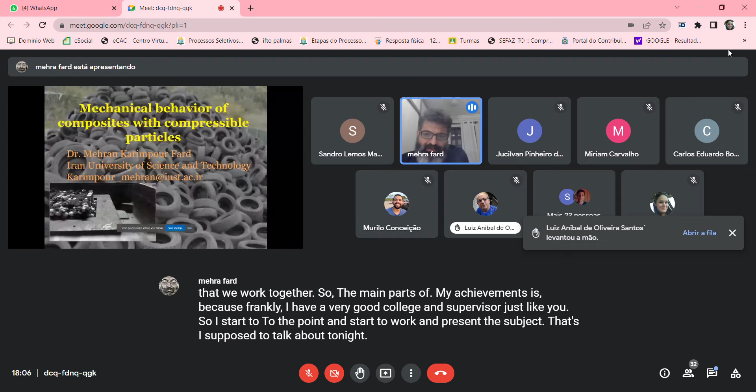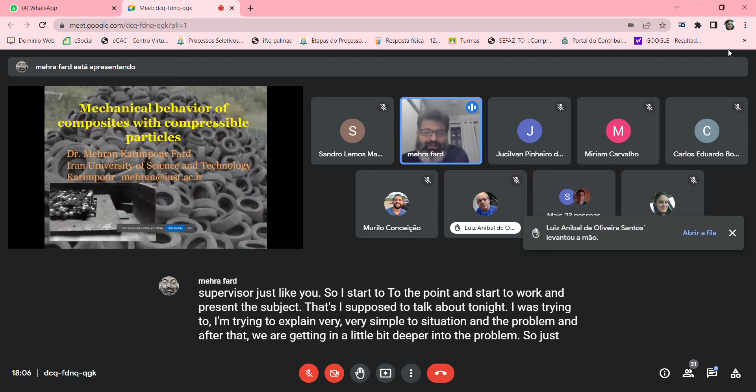So I start to the point and present the subject that I'm supposed to talk about tonight. I'm trying to explain very simply the situation and the problem, and after that we get a little bit deeper into the problem. So just for a final check, is my voice and everything okay or not? Yes, I can hear you perfectly. Okay, thanks a lot.

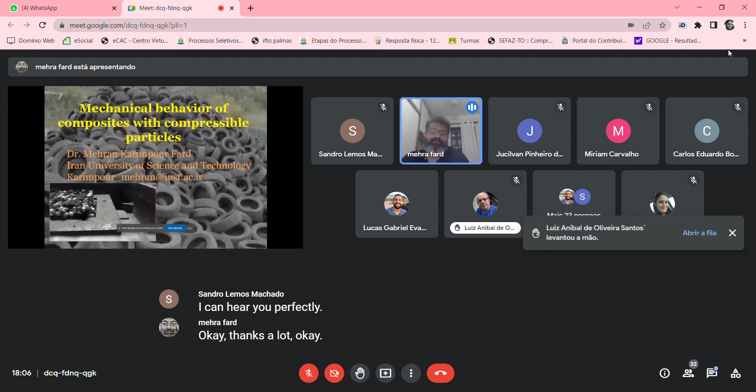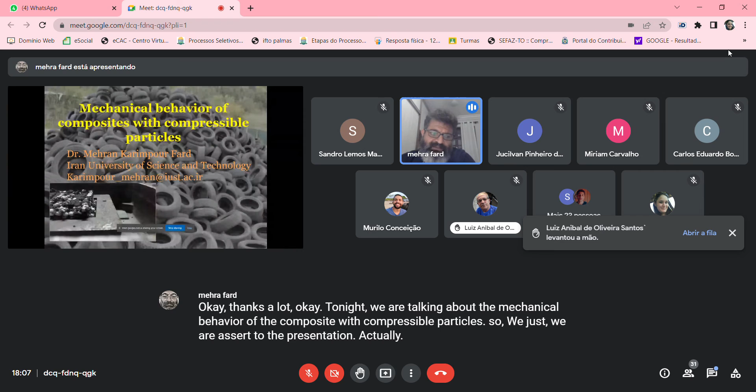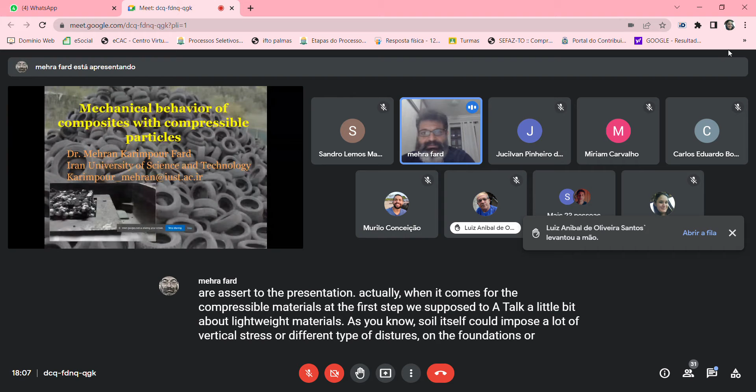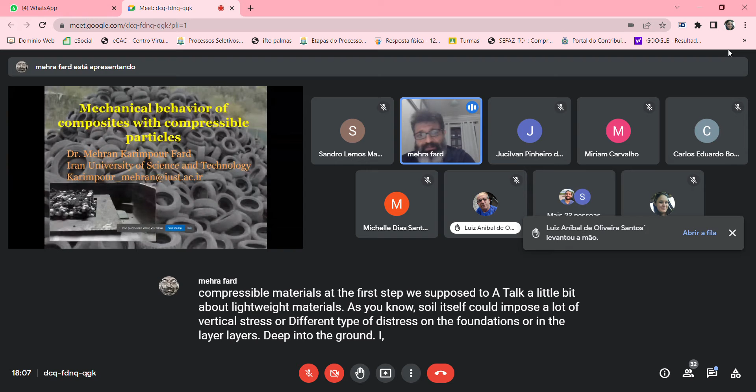Okay, tonight we are talking about the mechanical behavior of composites with compressible particles. So we start the presentation. Actually, when it comes to compressible materials, as a first step we're supposed to talk a little bit about lightweight materials. As you know, soil itself could impose a lot of vertical stress or different types of stress on the foundations or on the layers deep in the ground. If I gather the range of the unit weight of soil, sand, silts, or clay, they generally range about 1.85 to 2.3 ton per cubic meter.

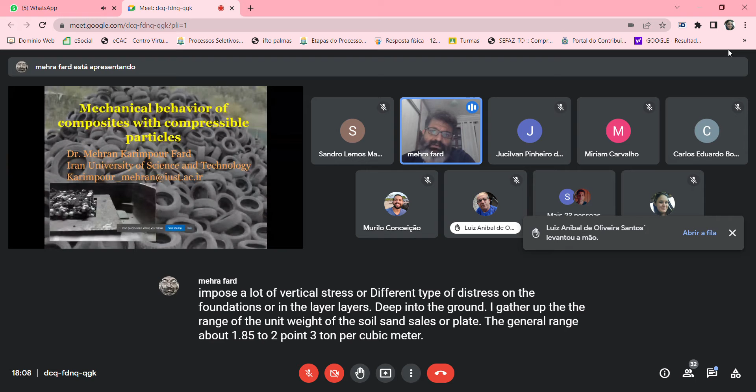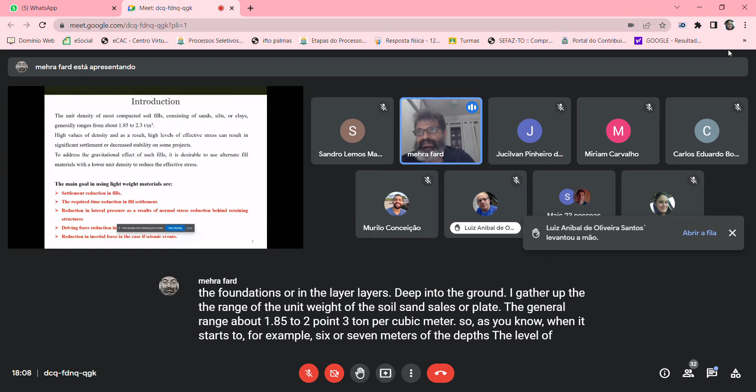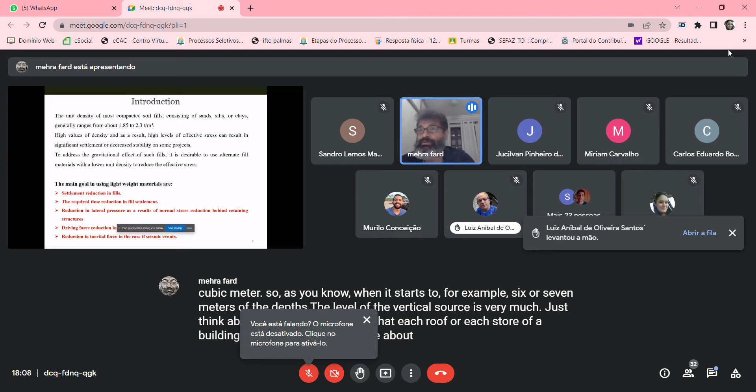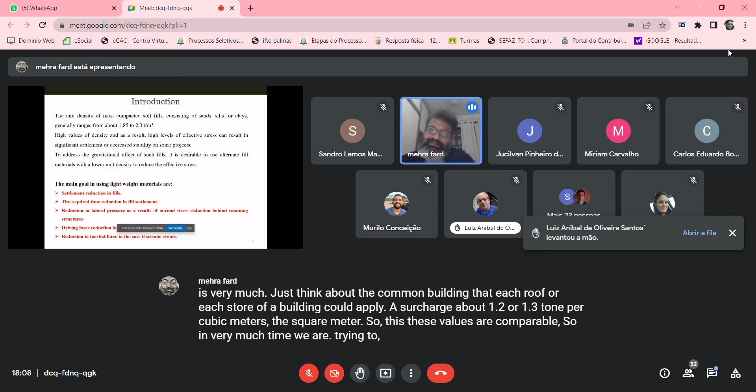So as you know, at, for example, 6 or 7 meters of depth, the level of the vertical stress is very high. Just think about a common building, where each story could apply a surcharge of about 1.2 or 1.3 ton per square meter. So these values are comparable. So very often we are trying to replace the common soil with lightweight material. But why? And what are we looking for?

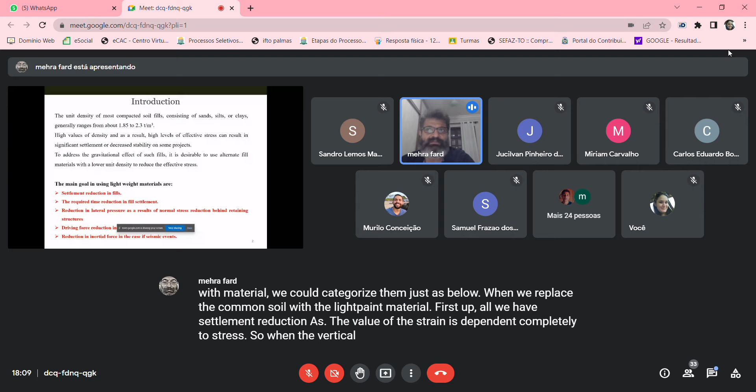If we categorize the main goals we are seeking to reach when using lightweight material, we could categorize them as below. When we replace the common soil with lightweight material, first of all, we have settlement reduction, as the value of the strain is completely dependent on stress. So when the vertical stress decreases, the vertical strain also decreases. Another thing is the reduction in the required time for fill settlements.

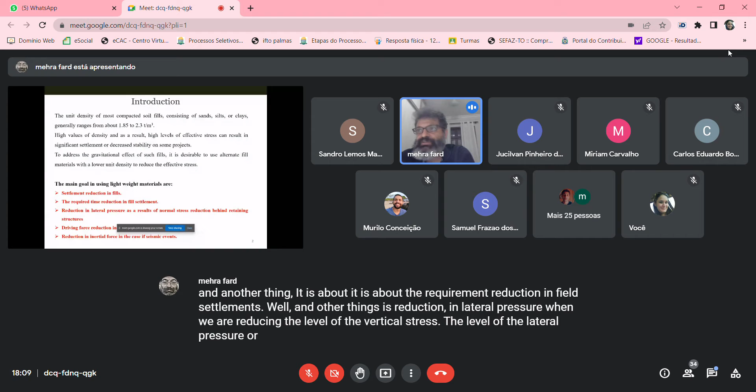Another thing is reduction in lateral pressure. When we reduce the level of the vertical stress, the level of the lateral pressure or horizontal stress also decreases. There is also some evidence regarding the effect of the material and type of material on the coefficient of lateral earth pressure.

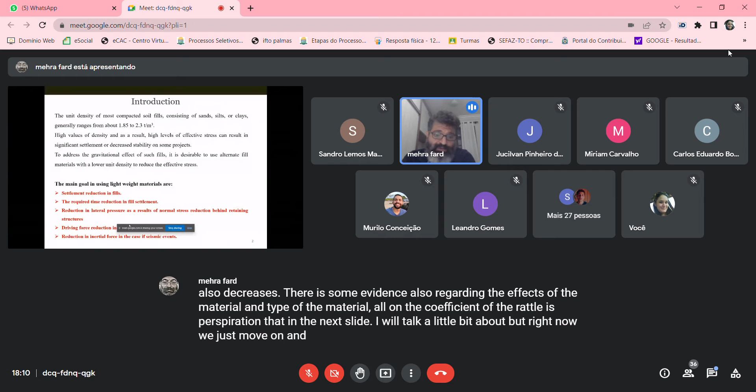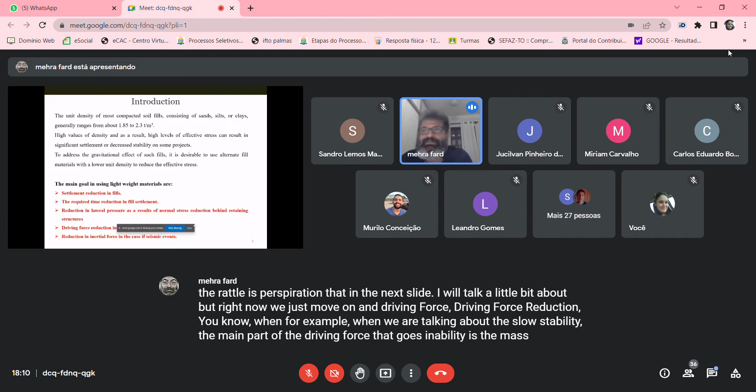In the next slide I will talk a little bit about it, but right now we just move on. And driving force reduction: for example, when we are talking about slope stability, the main part of the driving force that causes instability is the mass of the soil. So when we decrease the mass, generally the driving force also decreases.

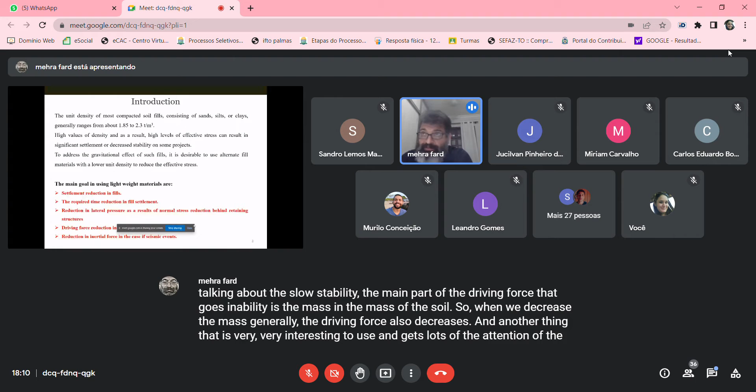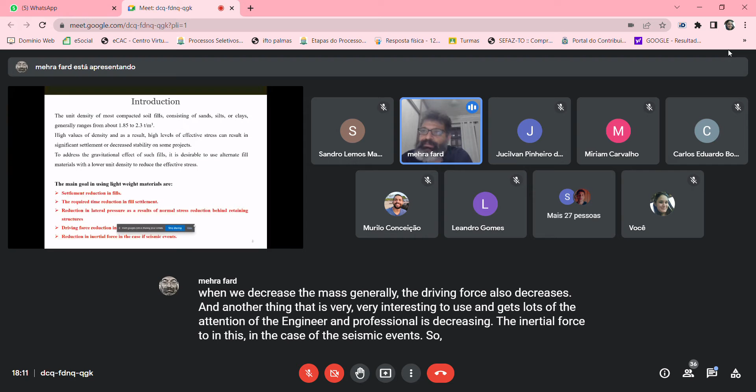And another thing that is very interesting to use and gets lots of the attention of engineers and professionals is decreasing the inertial force in the case of a seismic event. So if, for example, we are backfilling a wall with lightweight material, the level of the inertial force also decreases.

Okay, according to FHWA, there is a section regarding lightweight materials with some design considerations. First of all, we should know that lightweight fill materials have lots of potential uses and applications in highway engineering. But the design considerations are, first of all, load reduction. When we replace the soft soil, for example, in highway engineering we are supposed to make a fill or embankment to make the road.

And in such cases, we are sometimes facing a foundation of soft soil. So first of all, as the embankment itself could apply a considerable amount of load, when we replace it with lightweight materials, definitely we have load reduction.

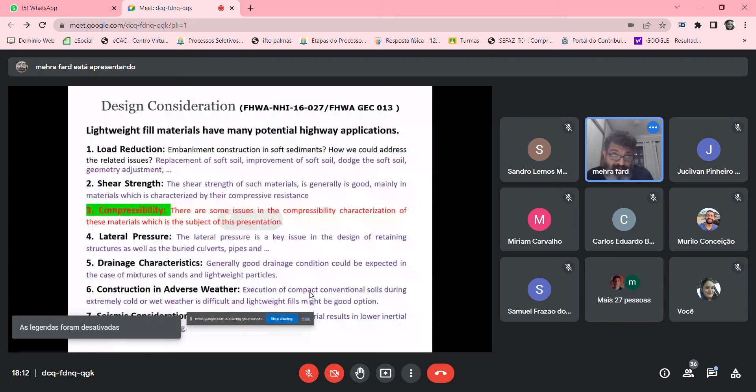And another thing, the shear strength. The shear strength of such lightweight material is generally good, mainly in materials which are characterized by their compressive resistance. For example, sometimes we are using blocks of EPS or blocks of light concrete, whose unit weight is really small, and they have compressive resistance in the form of cohesion from the point of view of us geotechnical engineers.

And the third is the compressibility. Actually, the compressibility is the main issue that we are talking about in this presentation. The lateral pressure, drainage characteristics, construction in adverse weather, and seismic considerations are the other design considerations which we should take care of and address. Okay.

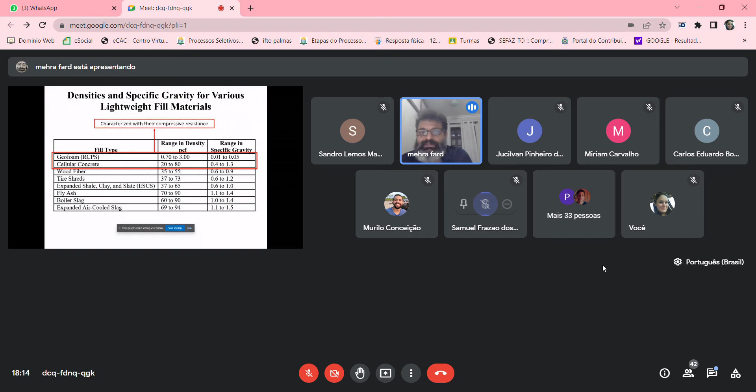In the case of density and specific gravity for the various lightweight materials, these are the types of lightweight material that are common in the industry: geofoam, with a specific gravity range of about 0.01 to 0.05, and cellular concrete or lightweight concrete, which is 0.4 to 1.3. Actually, this type of lightweight material could be characterized by its compressive resistance.

They are not granulated, but there are other types of lightweight material like wood fiber, tire shreds or TDA, tire derived aggregate, expanded shale or LECA, fly ash, boiler slag, expanded air-cooled slag, which right now is very common. These types of geomaterial are granulated, and for this reason we could characterize their mechanical behavior in the form of shearing resistance, which could be frictional, or part of them could also have some cohesive resistance.

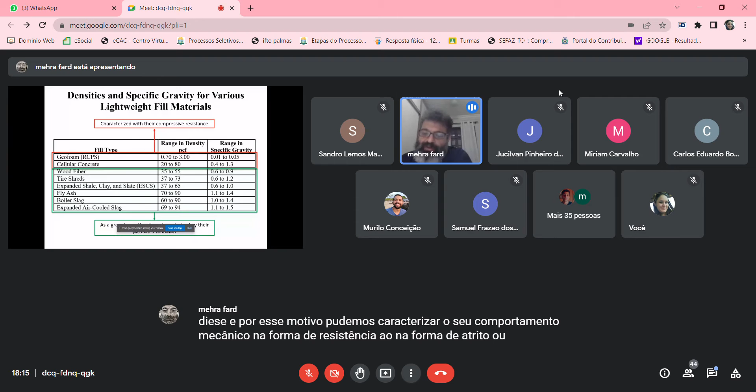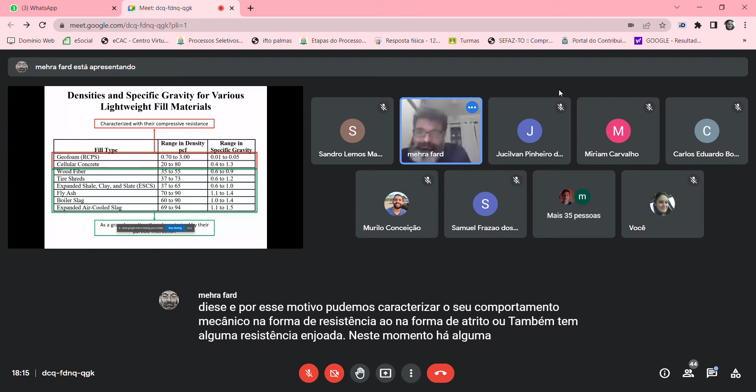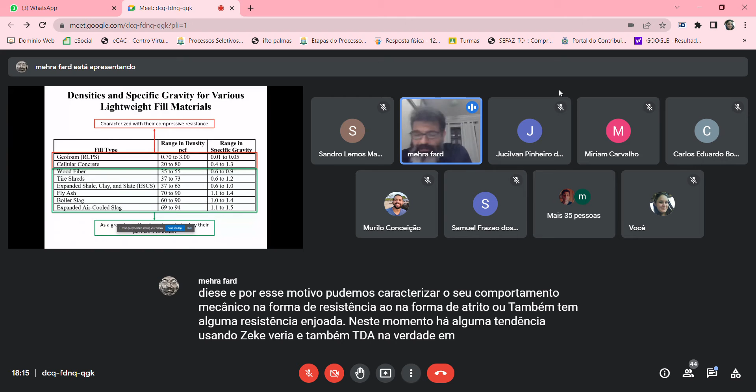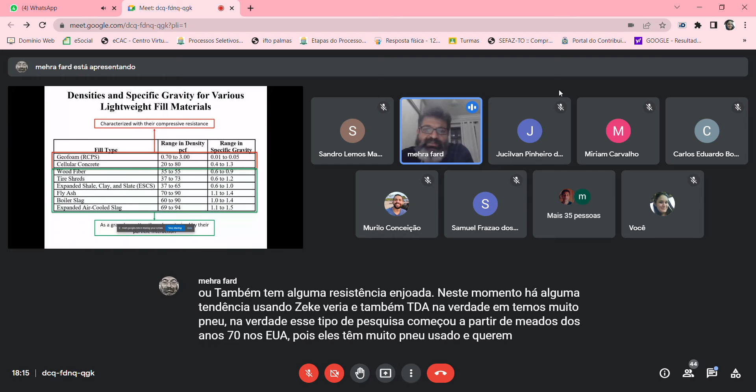Right now, there is some tendency to use granulated materials like EPS, as you can see, and also TDA. Actually, they are granulated tires. This type of research started in the mid-70s in the USA, as they had lots of used tires and they wanted to get rid of them. So they started to find ways to use this waste material.

So they started to use different types of products from the tire waste. They started to use tire as a reinforcement material, but in granulated form, it could decrease the unit weight of the mixture, which could be used as a lightweight material. So here we have the range of EPS composite soil and TDA composite soil. It ranges from 5 to around 18 kilonewtons per cubic meter for EPS composite soil, and for TDA between 6 and around 18.

When you compare them with general soil, whose unit weight ranges from 14 to 20, you can see that using this type of mixture, we could considerably reduce the unit weight, and as such the level of vertical stress imposed on the foundation. Okay.

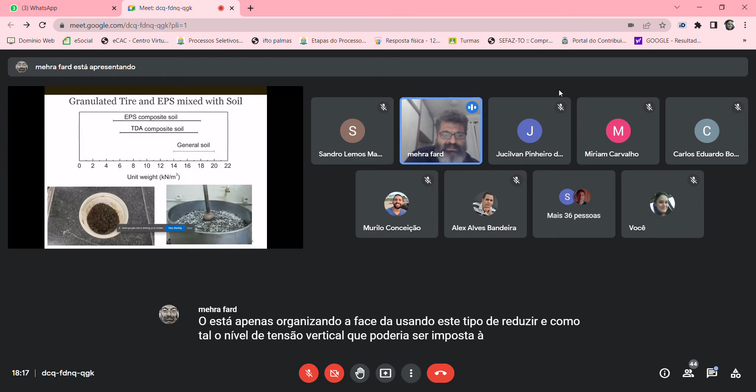Before I get into the mechanical response or mechanical behavior of the mixture of sand and compressible material, I think it's better that we get a little into the features of the soft-rigid particle mixture. Actually, it is really new research using DEM, discrete element modeling, presented by Zhang et al., that I found very interesting. So I used some of its graphs and figures to give you some illustration.

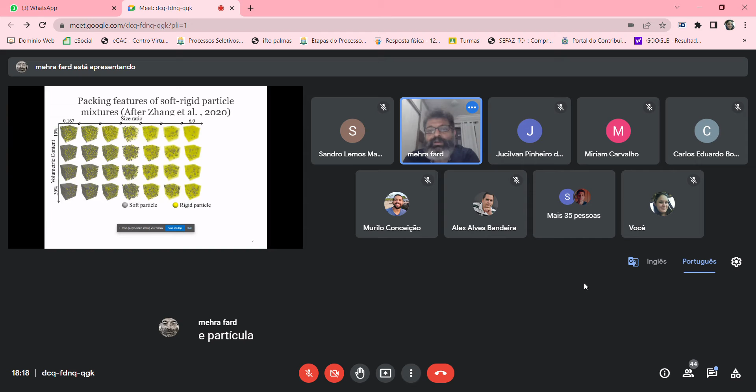Here, you could see the mixture of the soft particle and rigid particle. On the horizontal axis, you could see the size ratio. Actually, the size ratio is the ratio of the D50 of the soft particle to the rigid particle, and the vertical axis is the volumetric content, which means the percentage of the soft particle.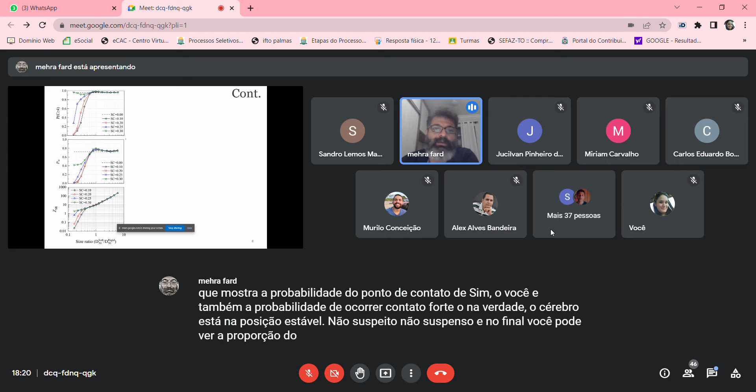Here we have a graph that shows the probability of more than 4 contact points, which varies with size ratio, and also the probability of strong contact occurring. Strong contact means the grains are in a stable position, not suspended. And at the end, you could see the ratio of the number of contacts divided by total particles. So if you see in the graph, by increasing the soft content, both of these values are increasing. But these are all just graphs. Let's see what they really are.

Okay, just assume we have two different ultimate or boundary conditions. First, assume that all the soft particles could be surrounded by rigid particles, and on the other hand, a rigid particle could be surrounded by soft particles. So before the stable condition, we could face two different unstable conditions. The first one is floating. Just when we are mixing the ingredients, in such a case, the number of contacts could not be more than 4 or 5.

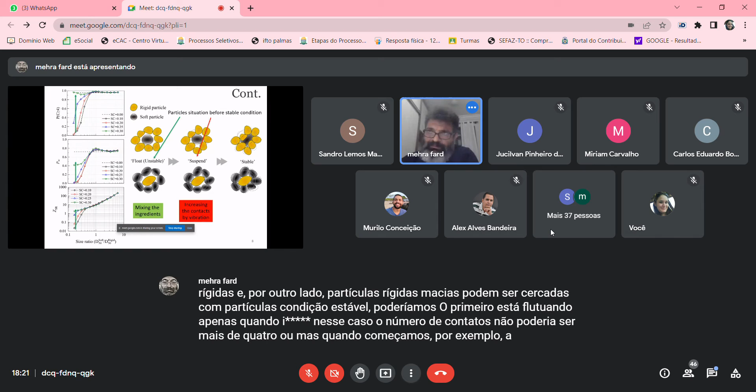But when we start, for example, shaking the mixture, the number of contacts increases. But the type of contact could not be called a strong contact, as in the second graph we talked about. So when we apply the confining stress, or when the layer is thick enough, the overburden stress starts to make really strong contacts. And in the case of the compressible material, you could see that the material has lots of deformation, and actually the contact points are not in the form of points. They are rather planar.

So here's the deal. We have two boundary conditions in the form of the rigid and soft particles. And here we could see by increasing the confining stress, the void ratio of the mixture decreases. When the void ratio decreases, it means that the hydraulic conductivity or the permeability also decreases. So we cannot be sure that drainage will occur. It means that the probability of an undrained condition during loading is really high.

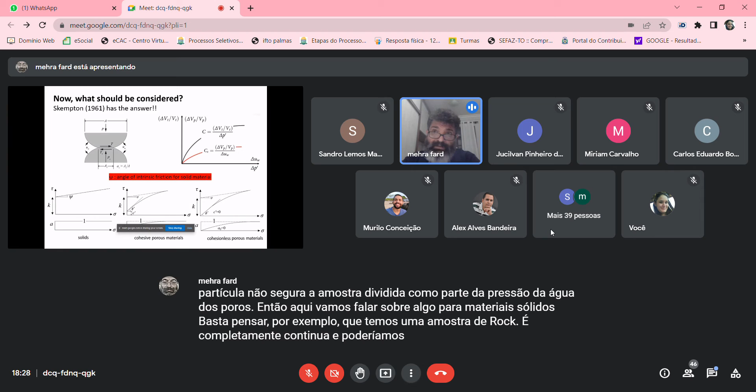Just think, for example, we have a sample of rock. It's completely continuous, and we could characterize its mechanical behavior using the compressive resistance. But what happens if the level of the confining pressure increases? When we increase the confining pressure, the shear strength of the rock also increases. So in such a case, we call this the angle of intrinsic friction, which could be represented by the quality and the type of the material.

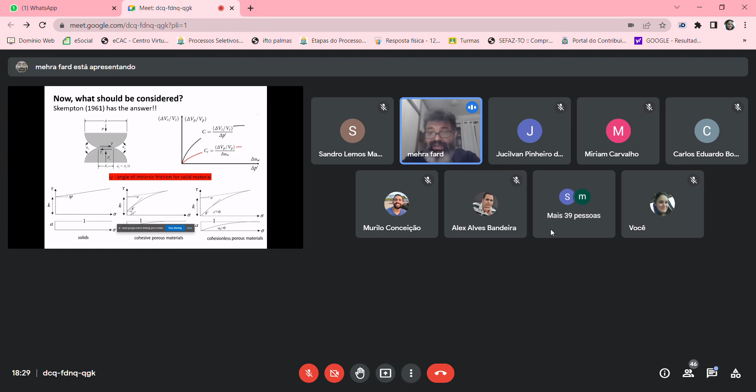But this happens for solids in the form of rock or concrete, something like that. When we are facing granular materials, in the case of cohesive porous materials, we have a value of cohesion and a graph with an internal friction angle which approaches the psi value. But in the case of cohesionless porous material, the cohesion is 0, and this curve is Mohr-Coulomb but not linear. It could be characterized by phi prime and psi.

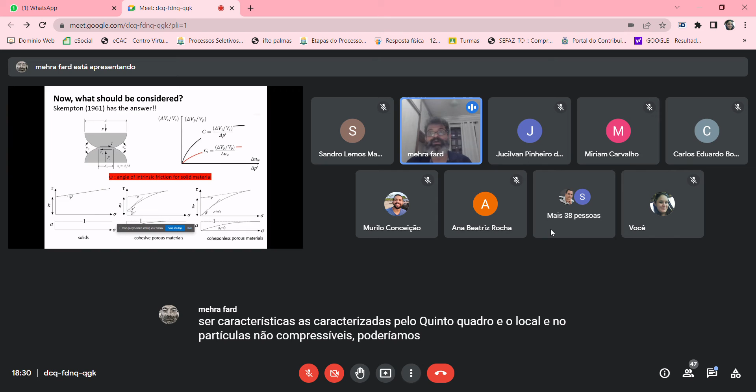And in the lower graph, you can see the A value, the ratio of the contact area to the whole area. In the case of solids, it is about 1. In the case of cohesionless or cohesive porous materials, it's not 1; it is very small. So for cohesionless porous material with non-compressible particles, we could use the equation of Terzaghi: sigma equals sigma prime plus U, the excess pore water pressure.

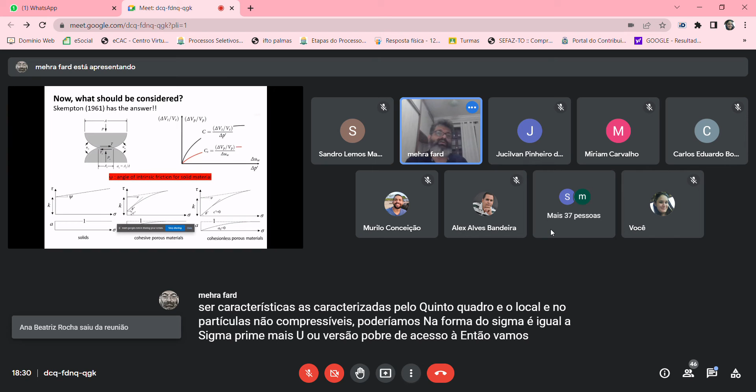So Skempton 1961 represented the volume change and also the shear strength of material with compressible ingredients using these two equations. In the first one, we have the compressibility of the particles and the total compressibility of the sample. In the second one, we have the intrinsic friction angle and the internal friction angle. So let's get started with some clarification and illustration of how all the theories we talked about could help us interpret the test results.

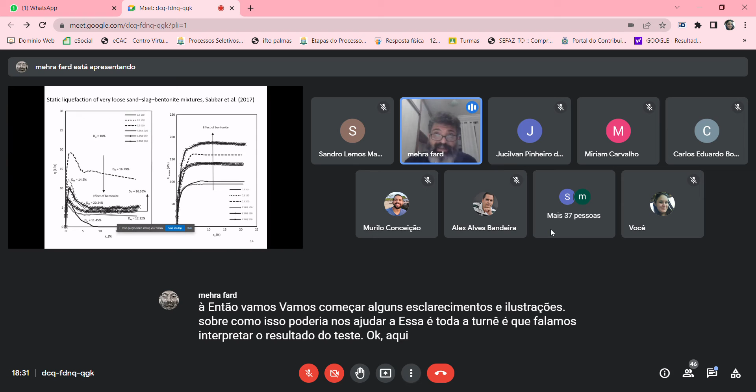Okay, here we have the result of the undrained test on the granular material: loose sand, slag plus bentonite. If you see in this graph, the right hand is the result of the excess pore water pressure. When we start to load the sample in the triaxial situation, with increasing axial strain, the pore water pressure also increases.

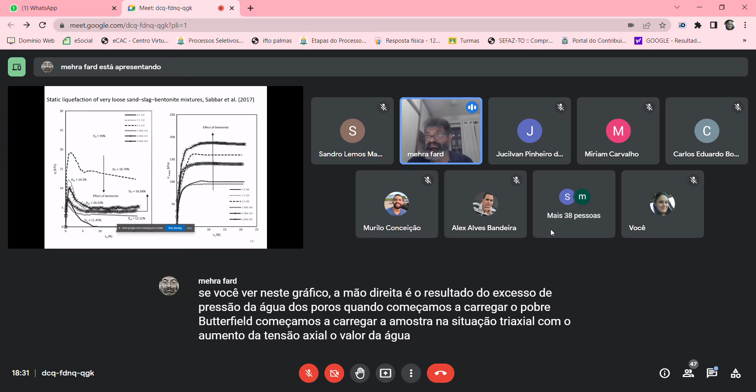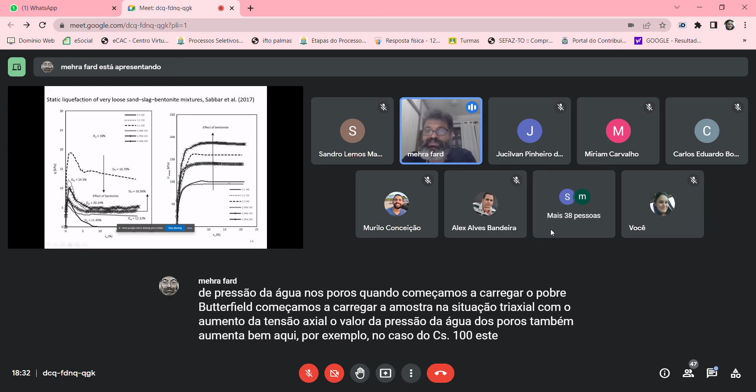Here, for example, in the case of CS 100, this graph, which means loose sand without any cohesive material inside, the pore water pressure approaches 100. And the very interesting thing is that the confining pressure also is 100. So confining pressure is 100, pore water pressure is 100, so sigma prime will be 0. It means there is no resistance among the particles in such a case.

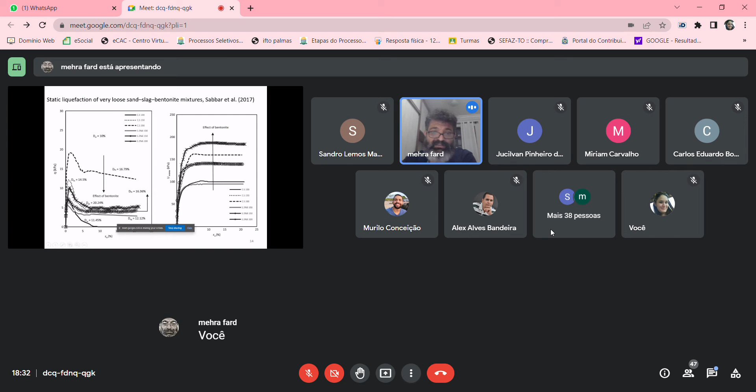And we can see here, in the form of deviatoric stress against axial strain, that for very, very loose material with a relative density of 11.45, we have a complete 100% drop in the shear strength. So what does that mean?

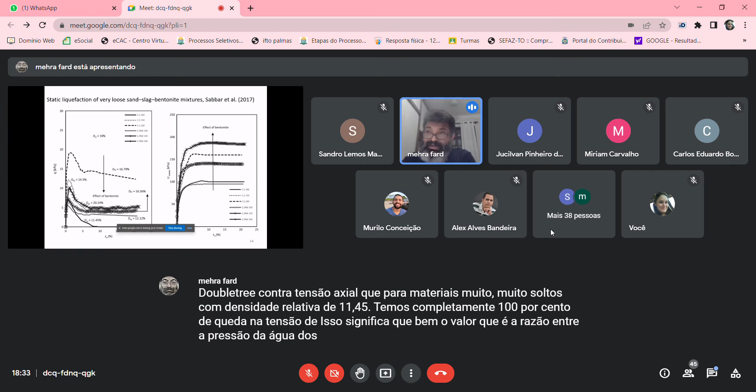It means that the value of RU, the ratio of the pore water pressure to the confining pressure, is approaching 1, which is a common concept in analysis related to liquefaction. When it approaches 1, it means we have liquefaction, static or cyclic. Okay, so let's see what is happening. Here are the results of the triaxial test.

Please activate your microphone now. Sorry, everyone, for this problem. Okay. So everything is okay. Yeah, just put your presentation in full screen mode, please. It's okay.

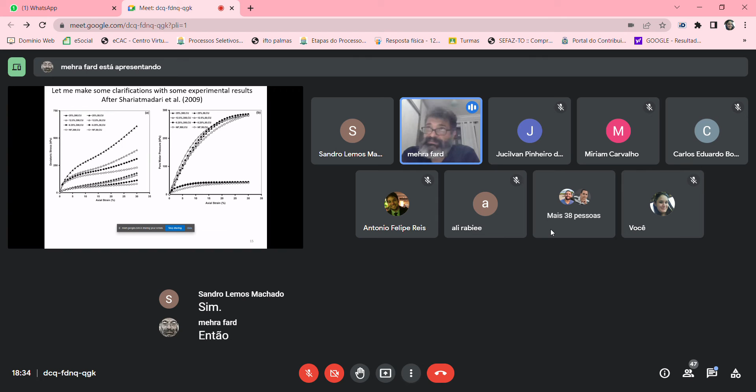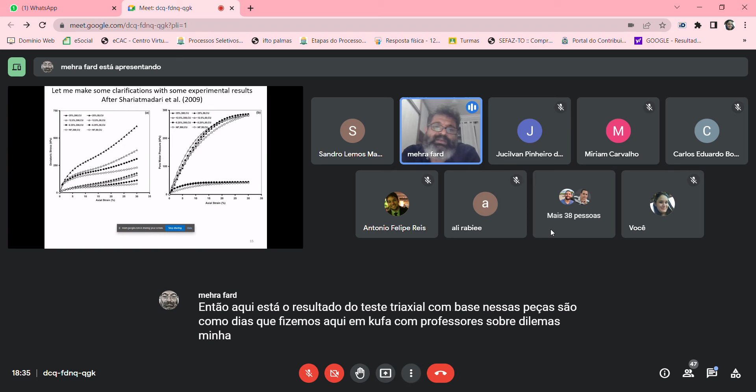Okay. So here are the results of the triaxial test on the waste, municipal solid waste, that we have done here in UFBA with Professor Sandro Machado for my dissertation. Actually, on the right hand, you see the result of the excess pore water pressure for two different confining pressures of 15 and 300. And on the left hand, we could see the result of the deviatoric stress against the axial strain.

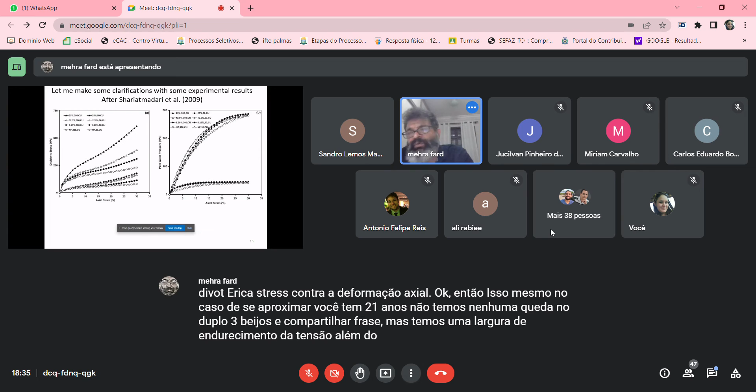Okay, so it is really interesting that even in the case of approaching RU to 1, we have not any drop in the deviatoric strength and shear strength, but we have a strain hardening with upward concave. Okay, so why does that happen? What is the reason?

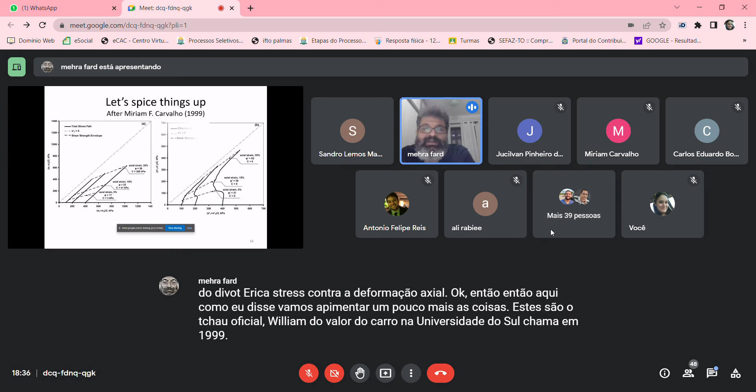So here, as I told, let's spice things up a little bit more. These are the results of the test on the waste conducted by Professor Miriam F. Carvalho in the University of São Carlos in 1999. These are the results of the total stress analysis and effective stress analysis on the same material with the same specific condition. So as you could see, for example, in the case of the axial strain of 35%, if we conduct the CD test, our internal friction angle will be 26.

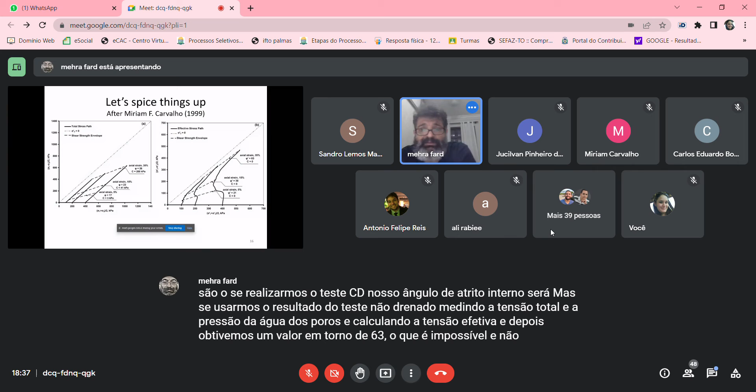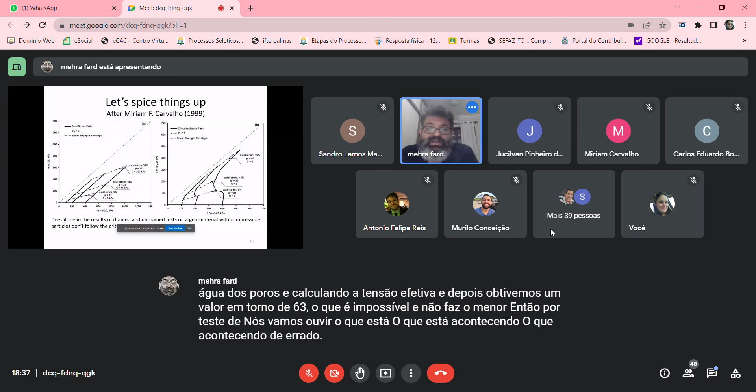But if we use the result of the undrained test, measuring the total stress and pore water pressure and calculating the effective stress, and after that calculate the value of the internal friction angle, we got a value around 63, which is impossible, and it doesn't make any sense. So why is that? Why are the results of the undrained test and the drained test not compatible here? What is going wrong? Do they not follow the framework of the critical state? Actually, they do, but the problem is other things.

Here, in the waste material, the contact point is not even a point because we have lots of compressible material. So in such case, we could not use the equation of Terzaghi to interpret the result of the undrained test. Here it is the equation represented by Skempton: sigma is equal to sigma prime plus UW times 1 minus RS, where 1 minus RS we could call A, which is a coefficient less than 1, to decrease the contribution of the excess pore pressure in the effective stress.

Here, for example, we have the critical state line, and the solid line represents the total stress in the slope of the critical state value of M. But when we use the results of the undrained test, the final point, if we use the common equation of Terzaghi, is the red point. But if we modify and amend the value of the pore water pressure using the A value, they could represent the same values of friction angle.

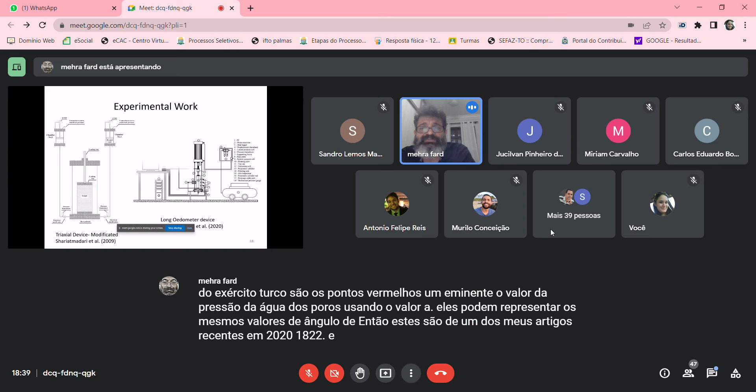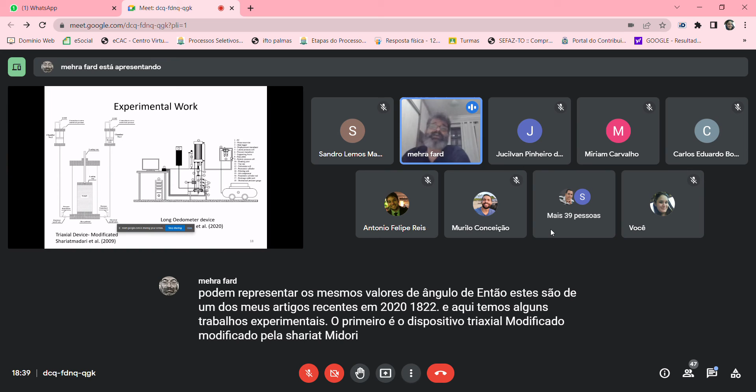So these are from one of my recent papers in 2022. And here we have some experimental work. The first one is a triaxial device modified by Shariatmadari et al. in 2009. Actually, as you know, in the triaxial test, the volume change in this device actually shows the reduction or even expansion of voids among particles, not deformation of the particles themselves.

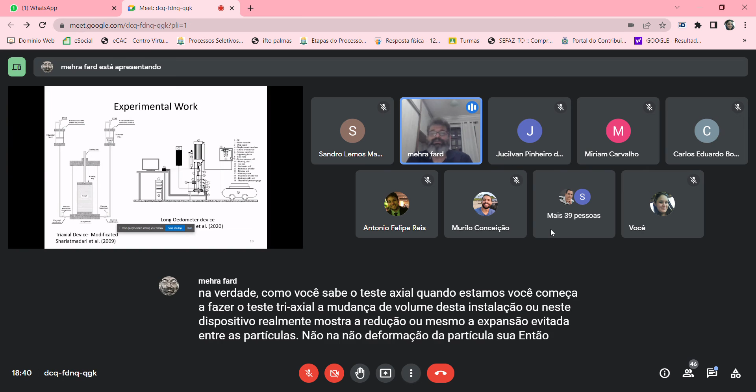So we made a modification on this triaxial device. For the cell pressure, we need water and pressure to apply the confining pressure. We measure this value. What does that mean? It means that when the sample starts to deform, to keep the confining pressure constant, some water should be injected into the cell. So to have a constant cell pressure, we are injecting water inside the cell.

So this way we could have the total volume change of the sample. And on the other side, we have the volume change regarding the reduction in the void ratio of samples. So their difference could be called the deformation or volume change of the particles.

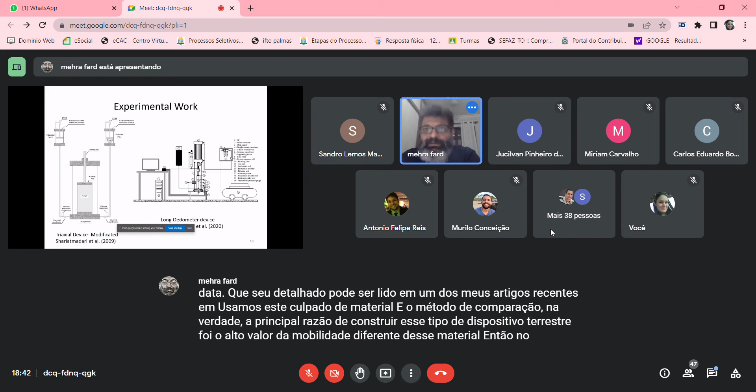Another device that we used was a long oedometer device, whose details could be read in one of my recent papers in 2020. We used it to measure the compressibility of compressible material. Actually, the main reason for constructing this type of long device was the high deformability of such compressible materials. So the common oedometer or consolidometer, where the thickness of the sample is about 2 centimeters and the diameter is 5 centimeters, we could not use.

Another issue in such an oedometer that we took care of is the internal friction between the material and the inside of the oedometer. So we made a lot of efforts to calibrate this type of oedometer.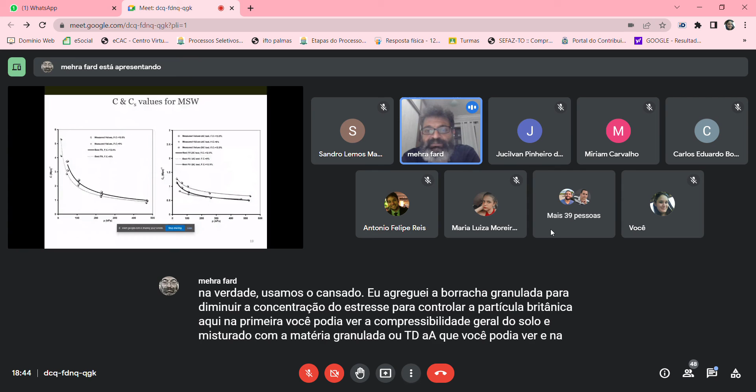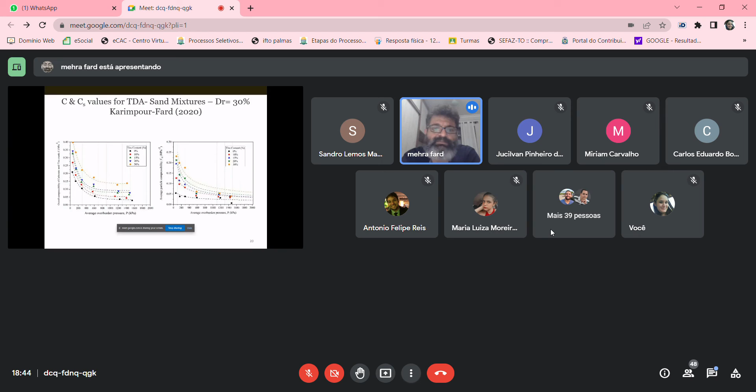Okay. Here are the results of the particle breakage against the tire content or the granulated TDA. As you could see, the level of the breakage decreases with the soft content, it means that the concentration of the stress at points could be decreased because of the deformation characteristics of this soft material. And in this manner, we could save the shear stress and shear resistance of the mixtures.

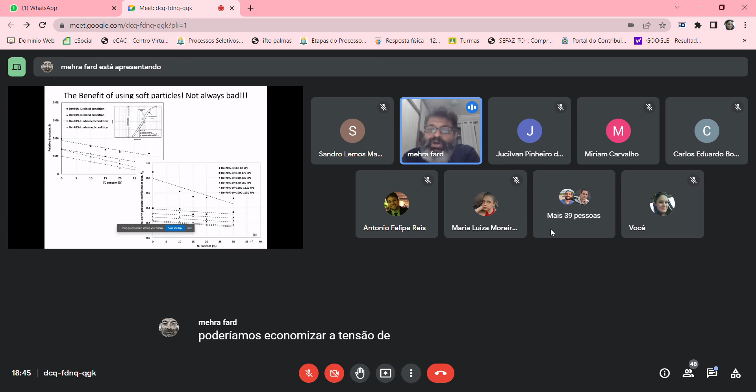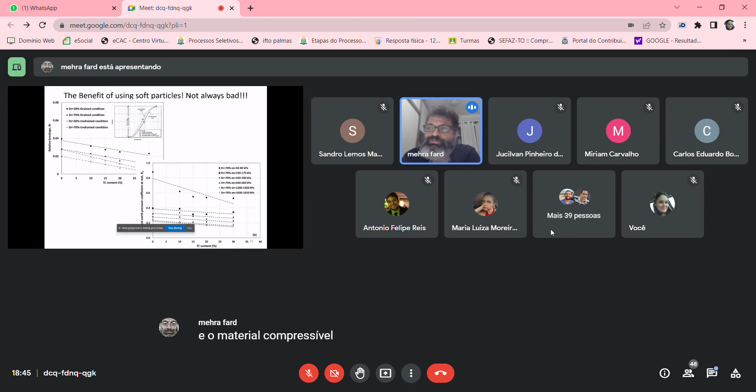And also in the other graph, you could see the result of the K0. As I told you, the K0 will be decreased with increasing the soft particles. So it is an advantage to add compressible or soft material to soil, mainly in the case of backfill. Not only do the level of the horizontal stress and the inertial stress decrease, the value of the K0 also decreases.

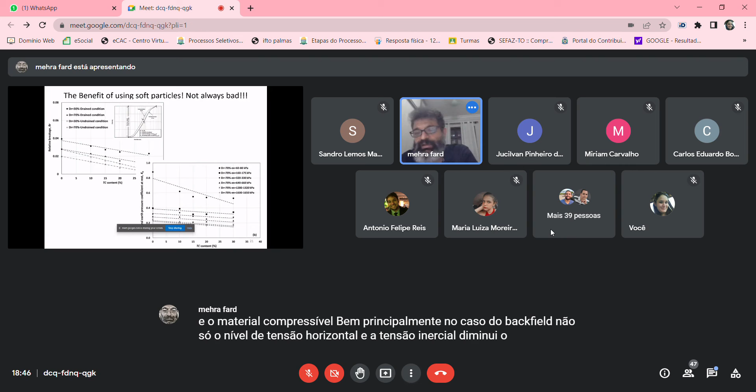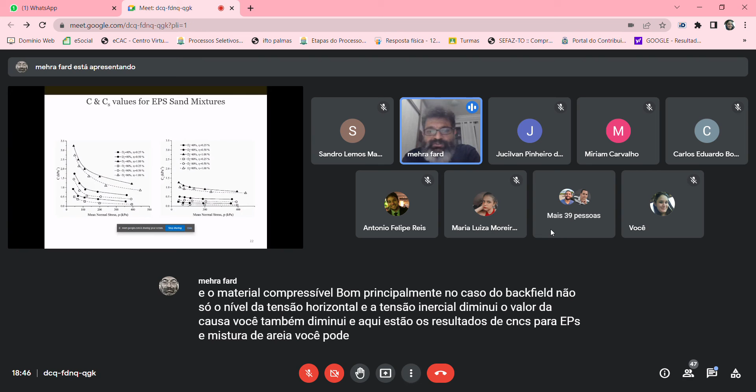And here are the results of C and CS for EPS and sand mixture. You could see the trends: with increasing the mean normal stress, both C and CS decrease. We have the results of the different levels of relative density and also the EPS content, which could be observed. And finally, these are the results of the A value for MSW, TDA, and EPS.

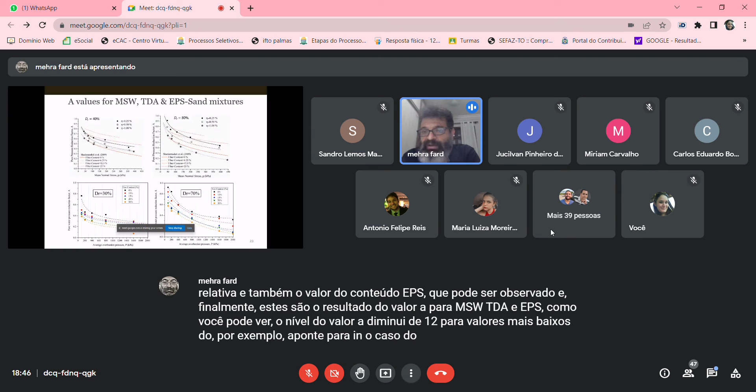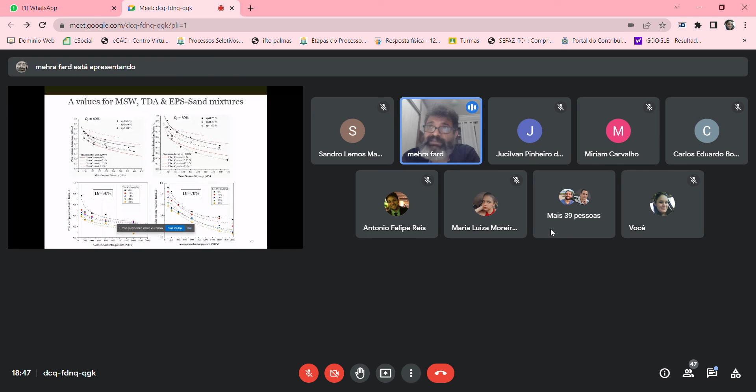As you could see, the level of the A value decreases from 1 to lower values, for example 0.2, in the case of the higher confining pressure of 500 or 450 in the case of the waste or even sand EPS, which is a lot, because with a reduction factor of 0.2, actually the effects of pore water pressure could be neglected. So just think, if we use the same value of the UW that we measure during the triaxial test, in the interpretation of the result we could not use the result directly, okay?

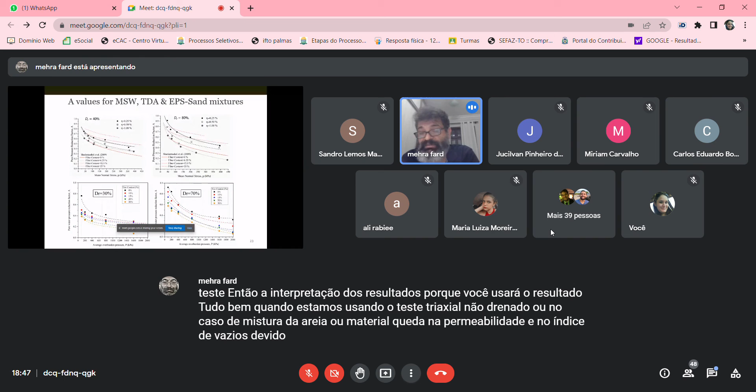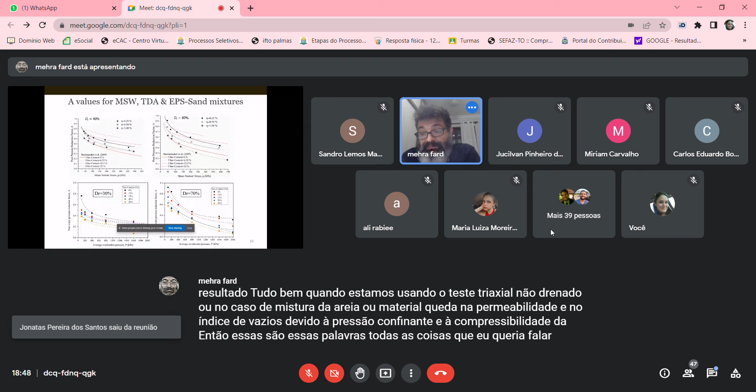When we are using the undrained triaxial test on a mixture of sand and compressible material, we have a huge drop in the permeability and the void ratio due to the confining pressure and the compressibility of the particles. So these were all the things that I wanted to talk to you about. I tried to be clear and very simple in the explanation.